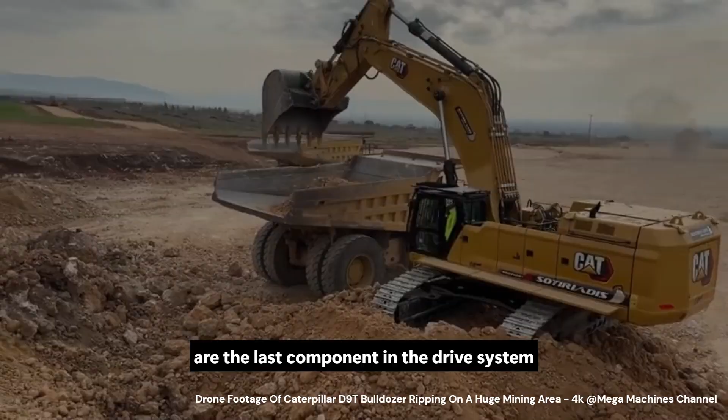Final drives, which are commonly used on bulldozers and excavators, are the last component in the drive system that transfers power from the transmission or hydraulic system to maximize torque based on load. The final drive does this primarily through a planetary gear set by multiplying torque and reducing speed.

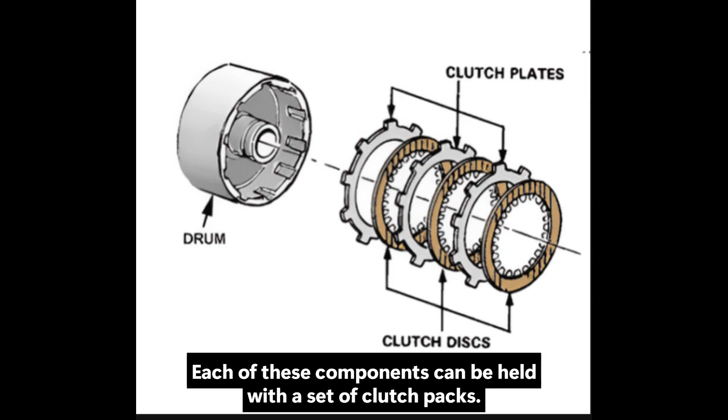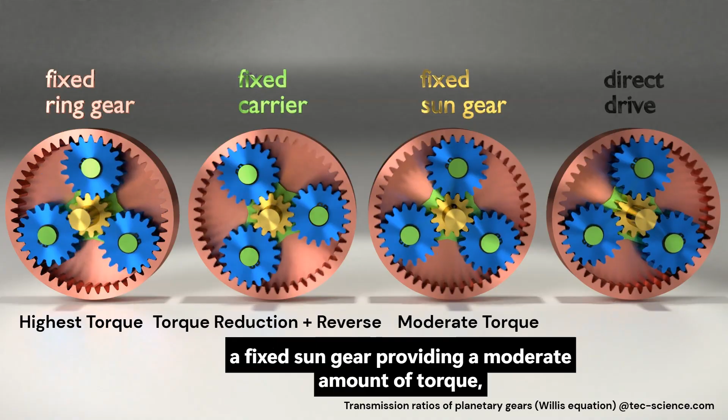The planetary gear set primarily consists of four components: the planets, the planet carrier, the sun gear, and the ring gear. Each of these components can be held with a set of clutch packs, with a fixed ring gear providing the highest amount of torque, a fixed carrier providing a torque reduction in a reverse direction, a fixed sun gear providing a moderate amount of torque, and a direct drive providing the least amount of torque.

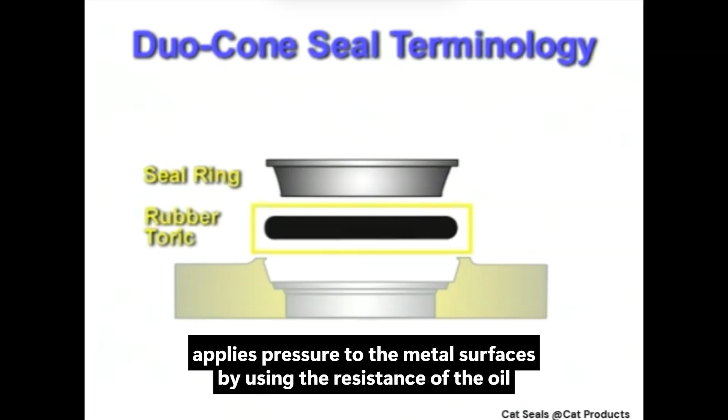To protect the planetary gear set and other components in the final drive, we use a component called the Duo-Cone seal to retain the oil and keep contaminants out. The Duo-Cone seal uses a set of two metal sealing surfaces that seal against each other to be able to rotate with the drive. A large rubber O-ring called a toric ring applies pressure to the metal surfaces by using the resistance of the oil to keep the two surfaces together.

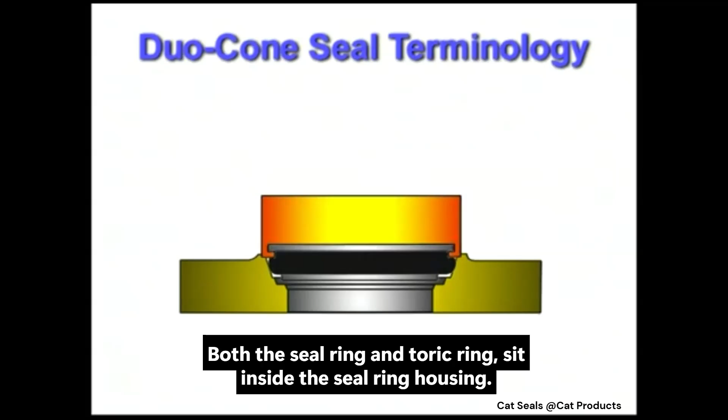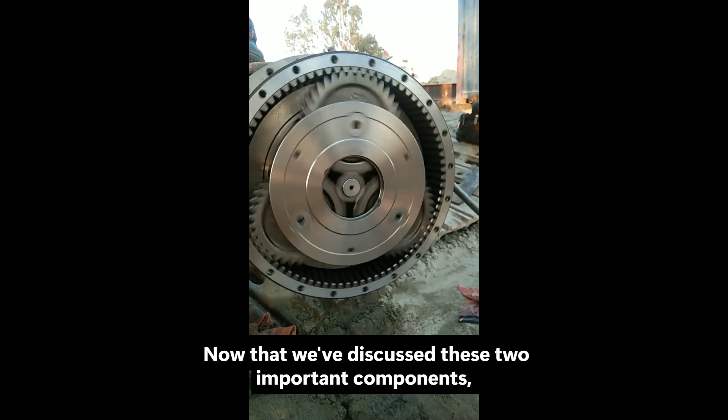The toric ring is designed so oil pressure pushes against the seal to create a better seal with higher pressure. Both the seal ring and toric ring sit inside the seal ring housing. Built into that housing is a small ramp that controls how much the seal compresses under load, with the retaining lip locking the whole assembly into place. Now that we've discussed these two important components, we can now start taking a look at the rest of the components during our assembly procedure.

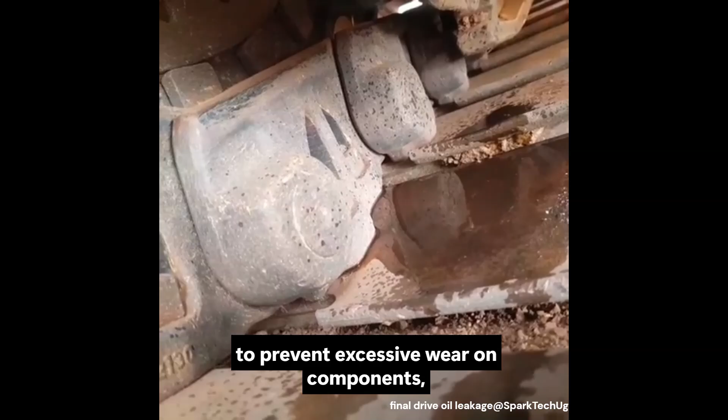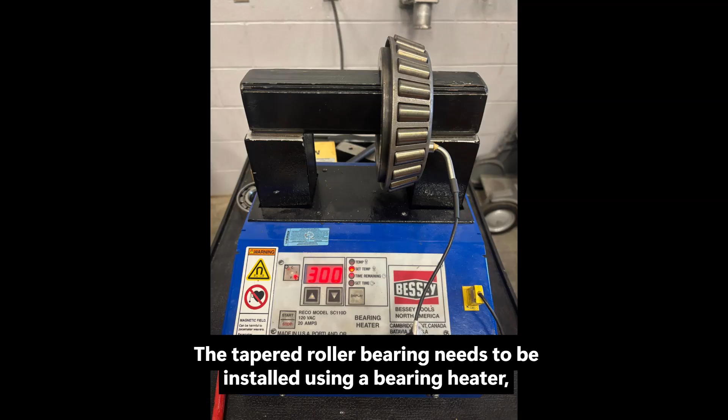Before we start, this procedure requires cleanliness and precaution before assembling. All parts need to be cleaned with brake clean or alcohol prior to prevent excessive wear on components, as dirt and debris from improper handling can result in premature failure. The first component we are going to install is our tapered roller bearing. The tapered roller bearing needs to be installed using a bearing heater, since we need heat to expand the bearing to fit and be installed onto the shaft without forcing it.

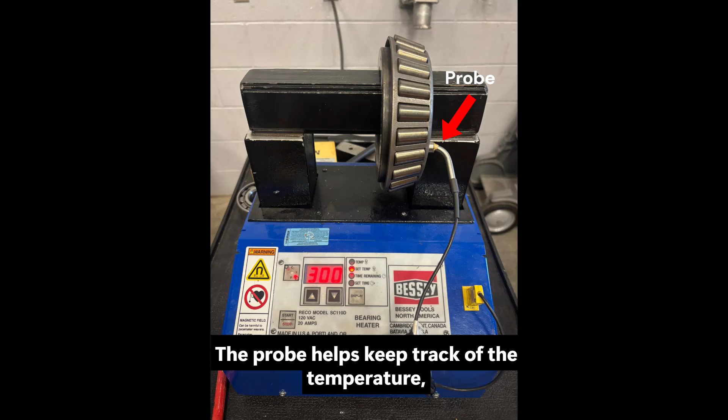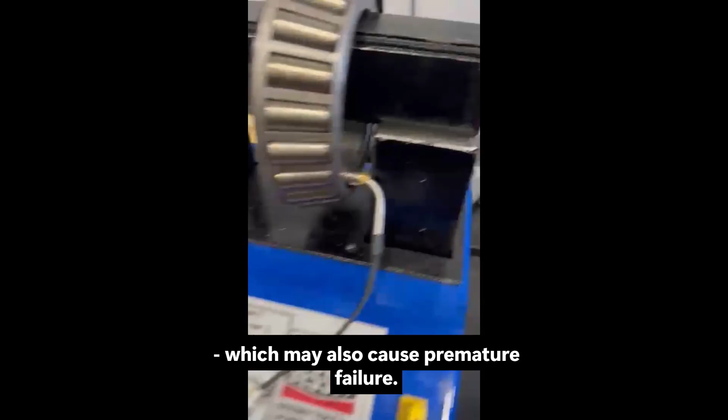To use the bearing heater, we first need to put the probe on the inner ring of the bearing. The probe helps keep track of the temperature, as we need to heat the bearing to 135 degrees Celsius. The machine also demagnetizes the bearing to prevent metal particles sticking to it, which may also cause premature failure. We use a marker to mark a point of reference on the bearing to indicate signs of wear, as scoring may appear with use.

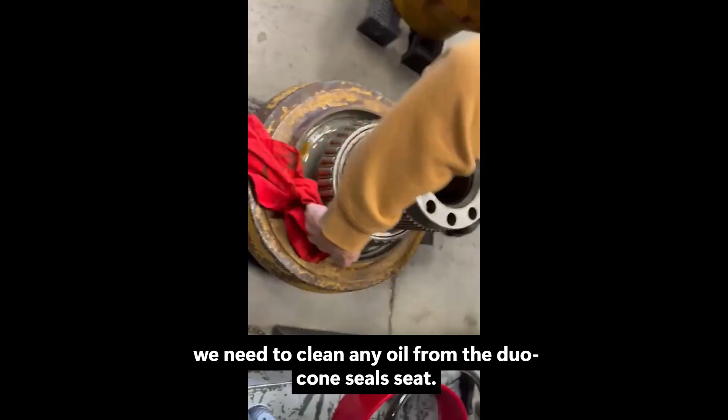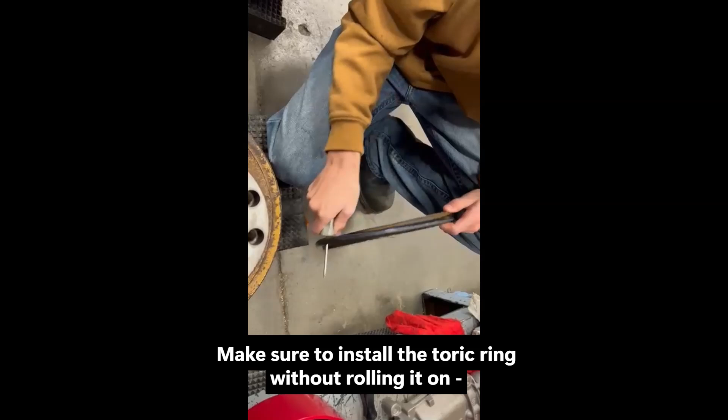Once the bearing is installed, we need to clean any oil from the duocone seal seat. We then need to install the toric ring onto the seal ring. Apply a thin film of clean oil around the seal ring. This helps the toric ring go on easier. Make sure to install the toric ring without rolling it on, as this may cause twisting, resulting in the ring coming out of its seat and wearing prematurely, as the drive will leak oil to open air and allow contamination to enter the drive. Place the seal in a special seal installer.

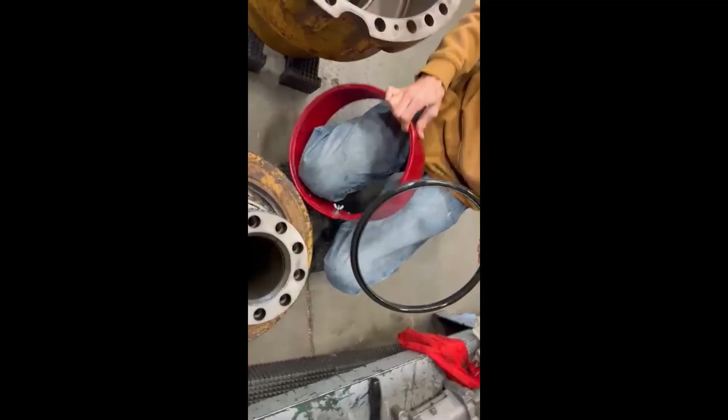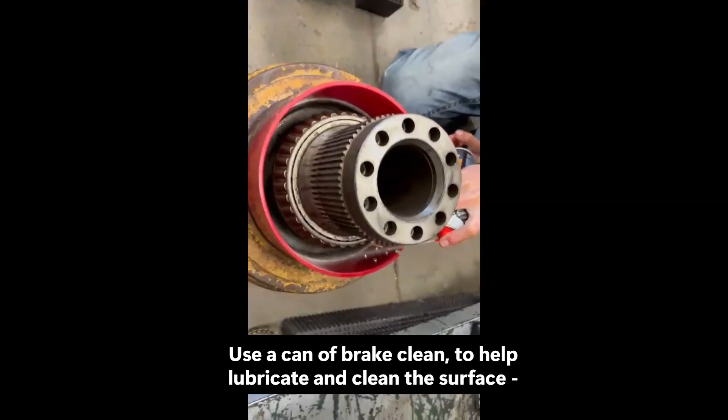You want to press the seal in, which prevents it from twisting as you install it into the seat. Use a can of brake clean to help lubricate and clean the surface as you press the toric ring in. You want to avoid using oil to lubricate during this process, as oil can push the seal out of its seat as it compresses.

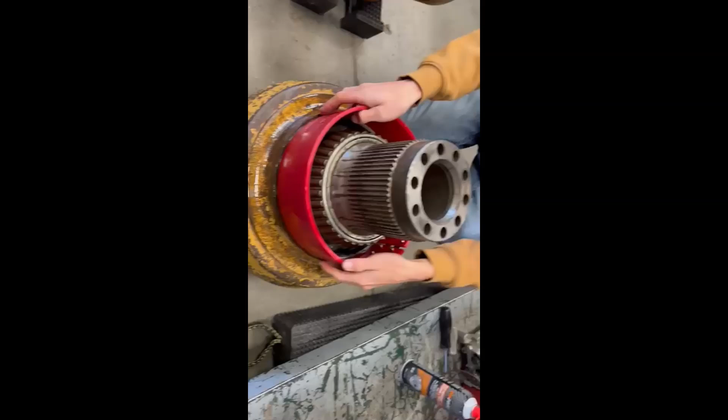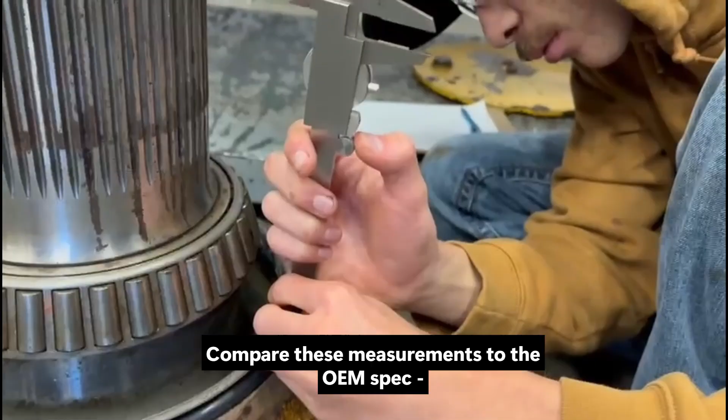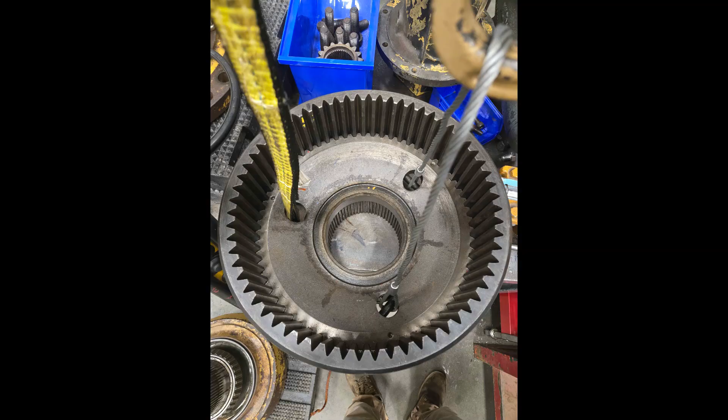Once the Duo-Cone seal is installed, use the depth indicator on a vernier caliper and measure it in 3 spots 120 degrees apart from each other. Compare these measurements to the OEM spec, as being out of spec won't allow the seal to align and load right, resulting in premature failure. Our next component, the ring gear, needs to be hoisted using 3 bolts long enough to fit across the openings, as we need to be able to remove the cable once installed.

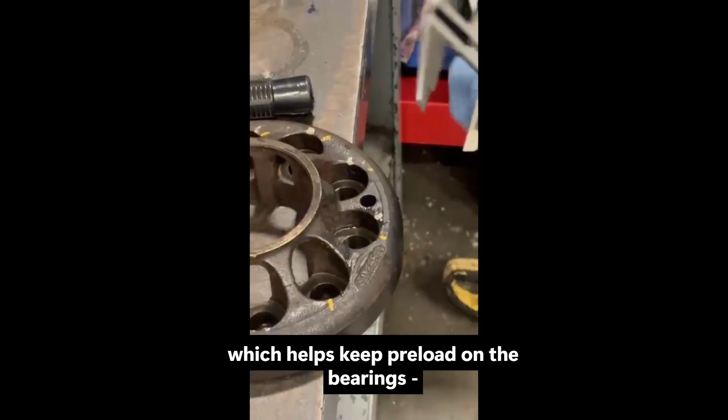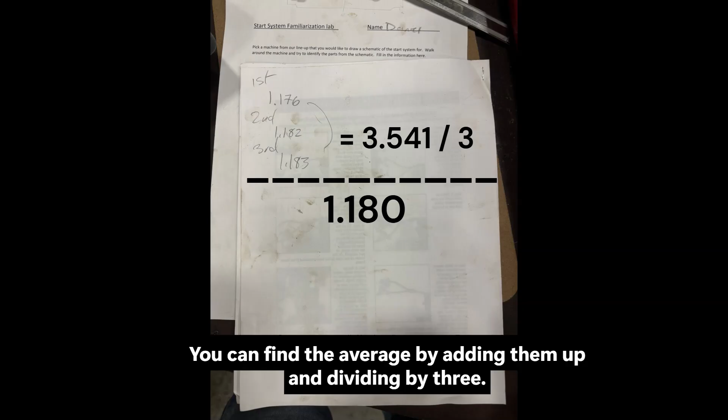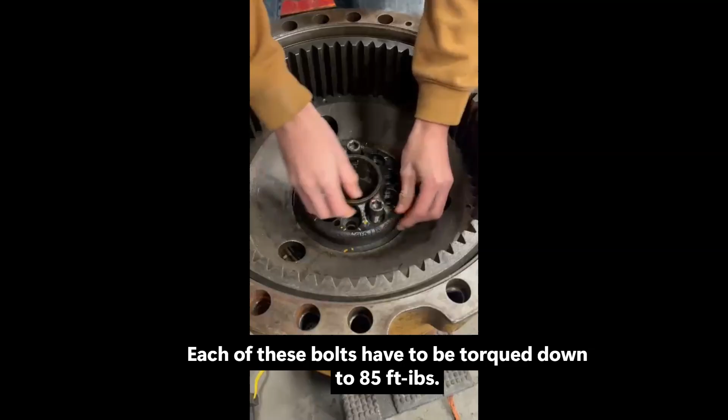Our next component, the retainer plate, which helps keep preload on bearings, needs to have its thickness measured with a vernier caliper. The thickness needs to be measured in 3 sections 120 degrees apart from each other. You can find the average by adding them up and dividing by 3. Now install the retainer plate onto the ring gear without any shims. Screw the plate in with 3 bolts 120 degrees apart from each other to clamp evenly. Each of these bolts have to be torqued down to 85 foot-pounds. Once these bolts are torqued, rotate the drive 360 degrees.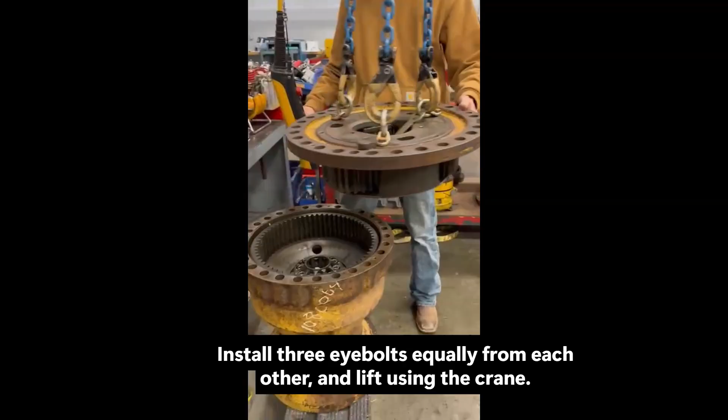For our last step, we will be installing our planetary gear set. Install 3 eye bolts equally from each other and lift using the crane. Rotate until the planetary gear set meshes with the ring gear. Bolt down the housing using a breaker bar until all the bolts are snug. Install the cover that sits over the planetary gear set.